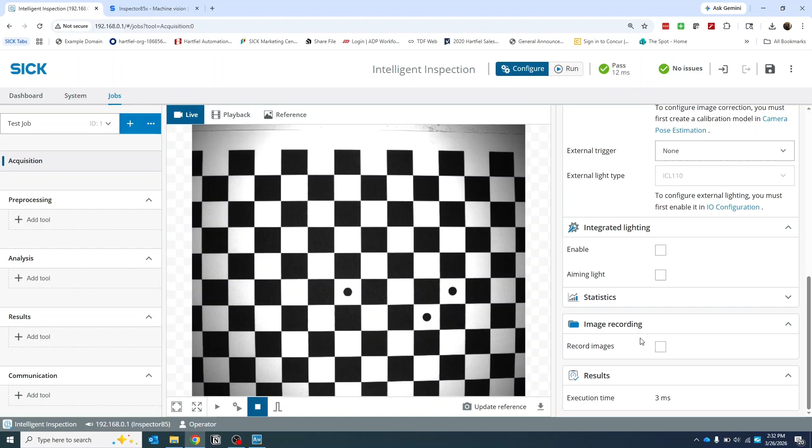And then how do we want to trigger the camera? Do I want to trigger via that photo eye or a sensor tied to us? Or do we want to have this command channel trigger via Ethernet IP or something like that? And then lastly here, we can record images through here. We will show a better way to do this, but if you wanted to record images, especially when you're setting up a camera and need to collect a lot of data, we can do that right through here.

So before we run into the other tools, I'm actually going to come into this system tab here. We're going to set up the camera a little bit more. So we've got our IO configuration to start. You can see that we have a handful of IO here. Our IO1 is always going to be our image trigger. And then other ones, we have some options here.

So our IO2, you can see we've got an encoder input. We can use it to update our reference image or job selection. The other guys here, we are able to do that job selection to build out a tree. I can trigger that external light if we wanted to, or update that reference image. So you're able to kind of set up your IO depending on what you need.

The next tool that we have here is the fieldbus tool. Now, I already have this set up as Ethernet IP, but you can see we can turn this off or have Profinet or Ethernet IP here. We can do DHCP if we need to. And then one thing to note is that we can have a separate IP address for the Ethernet IP than we do as the programming interface.

Really useful if you're connecting to a PLC but still want to program it without interrupting that traffic. Some of the other tools here that we can add is a command channel. So again, if we wanted to control the camera through an external source, we can come into here and say, I want to interface via fieldbus. Now we could do that with the fieldbus, we could do it with serial, or by setting up some of these TCP or UDP tools as well. We'll just leave it as fieldbus for right now.

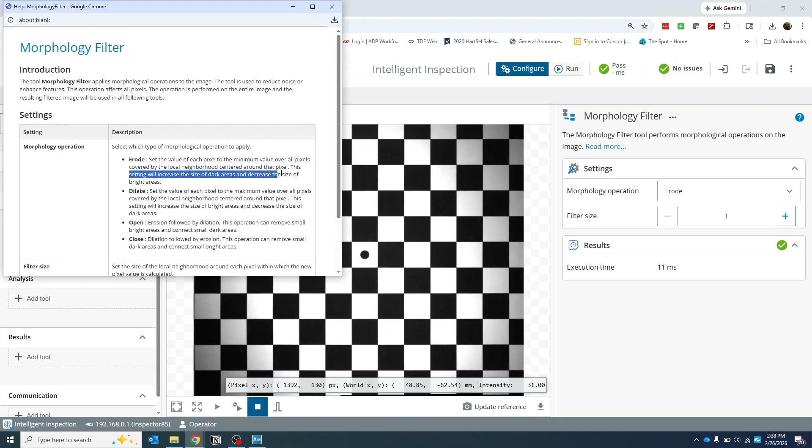Now, if you're not sure what erode and dilate and open and close mean, we can actually come into here and click this read more button right here. SICK has done a really good job where they've started to pull out some of the operating instructions and pull it into the software itself. So we can actually come into here and go, okay, what does erode mean? Erode: this setting will increase the size of dark areas and decrease the size of bright areas. Now you're able to very quickly know what these are.

We do also have a noise reduction tool. So if you are running into some noise that you want to get rid of, say our brightness is up pretty high, we are able to do that here. Again, for this application, we're going to just kind of run by.

So now we get into our analysis. This is where the meat and the potatoes of the vision software are. We've got a couple of different tools kind of grouped together here. We've got our locate tool, so blob locators, object locators, and we'll show that in a minute.

We've got some of the shape tools. So am I looking at circles? Do I want to find lines? Anything like that. Once we have our shapes found, we're able to get angles between them, distance between them.

And then once we go down to our count and find, we start getting into some of the AI tools that are available, and we'll show some of those here in a minute. But just note that there are D-Studio versions of some of the tools, which basically means that we are going to load a neural network in here rather than training on the camera.

Now, I won't show the D-Studio here. If you do have questions, feel free to reach out. We might do a video on that a little bit later if we get more interest.

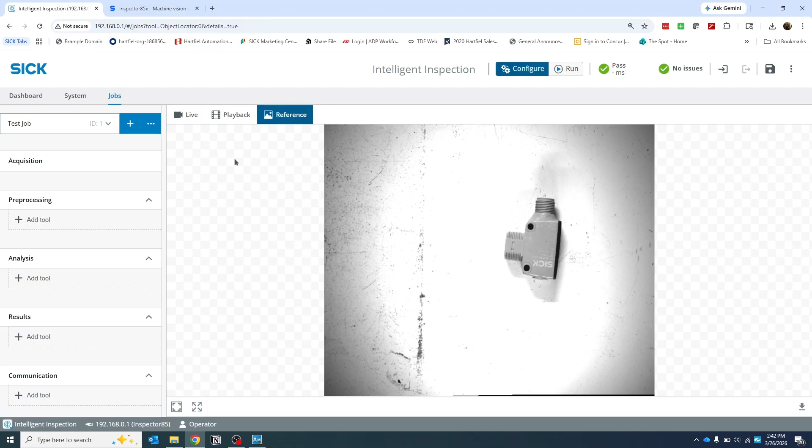So I'm going to come into here and show the object locator. Object locator isn't necessarily always needed, but it is good, especially if your product moves very slightly, or there's some rotation, or you just want to make sure that you're locating always correctly.

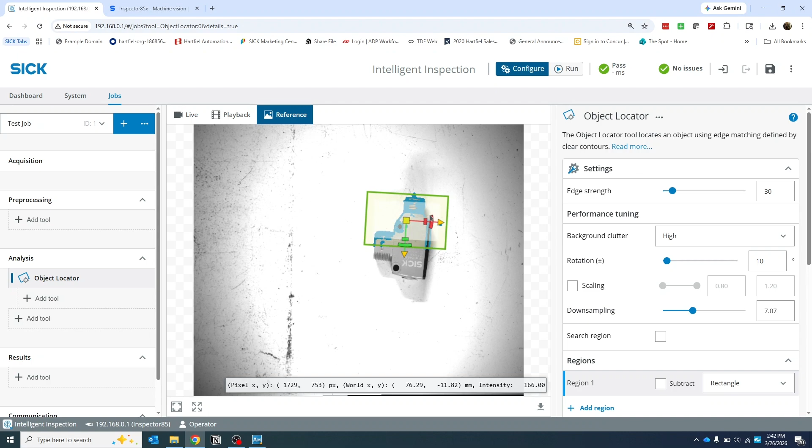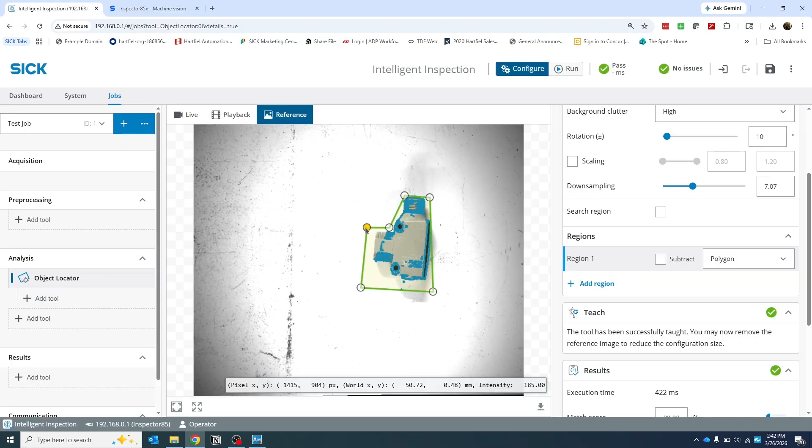So you can see here I've just got a bounding box for the tool, and I can rotate around the z-axis, come in and make this as big or as small as I want. I can even change this to an ellipse or a polygon to highlight it as neatly as I want. For this application, I don't need to get very specific, so I'm just going to do a general overview of the sensor and get pretty close.

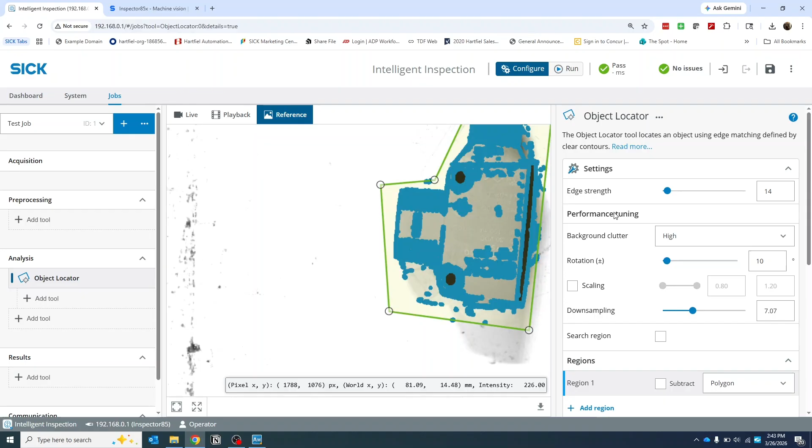Now on this edge tool, we want to find where the edge strength makes sense. If we bring this down, you'll see changes in what I'm outlining, so smaller defects, cracks, or scratches start getting caught. If I move this up, we might only catch the outline, just this black part on the back, which might be enough for the application. Here we're catching the circles for the mounting holes and that black back, which works pretty well. Maybe I want to take this nose away.

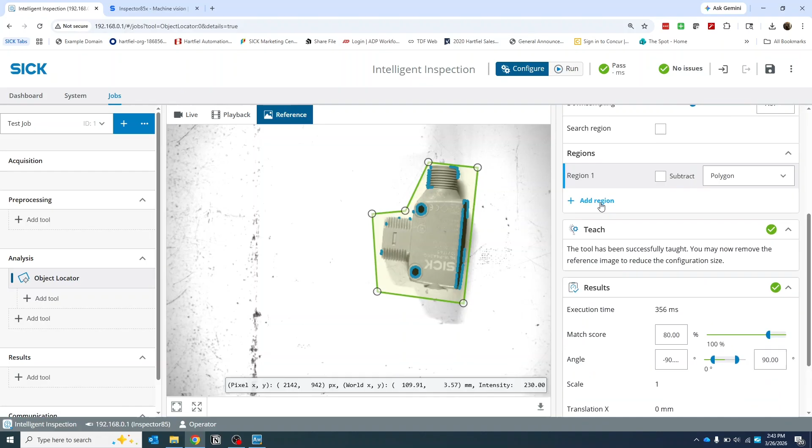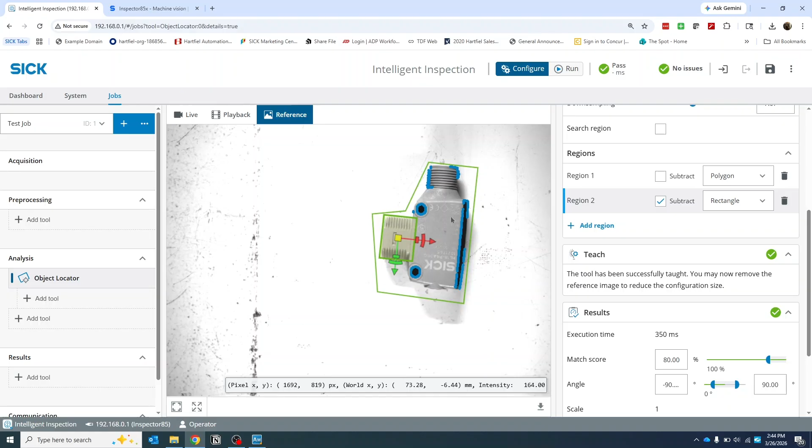I can either move my bounding box, or come in here and do a subtract region, so maybe I want to get just this and filter out specific areas. This is very useful if you're doing, say, bottles with different labels on them, or parts where something can change a lot. We don't want to look at those specific areas, but we want to look around them, so we can mask out different areas.

Now inside here, you can see we can set up different background clutter levels. We've got a pretty noisy background here, so I'll leave that as high. I'm going to allow this to rotate 180 degrees. And then if there are height variations, we can get into the scaling, and again that downsampling, so we're able to downsample a little bit more or less depending on what kind of speed you need.

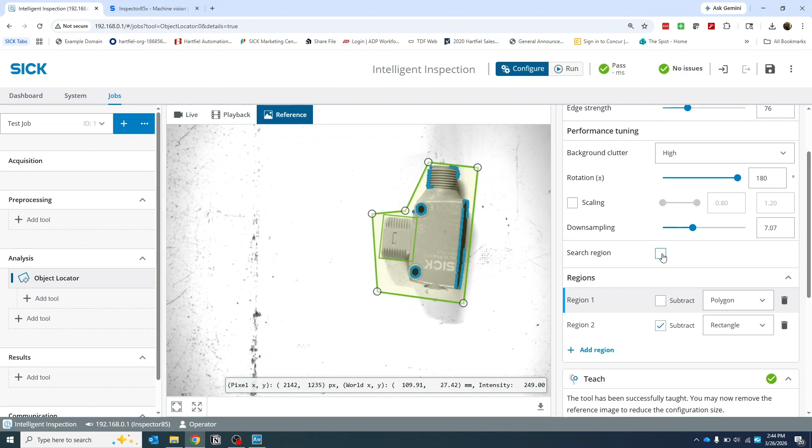Lastly, on top here is just a search region. If we wanted to look in a specific area for this object on our object locator, we could do that. Again, it helps with speed, and it helps if there are only certain areas where this object is going to show up. As we go down here, we're going to see the results over on the right-hand side.

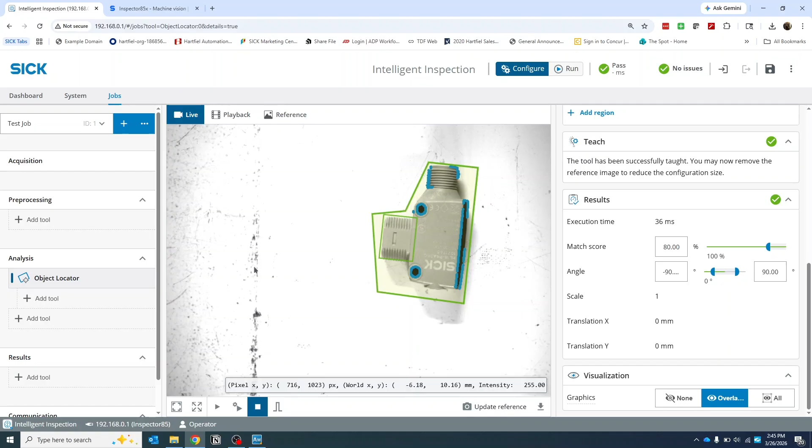So as I come in here and go back to my live image, if I move this part and rotate it, we might see that match score change a little bit, or be pretty low here. So I can come down and set where I want the tolerance of my rotation to be.

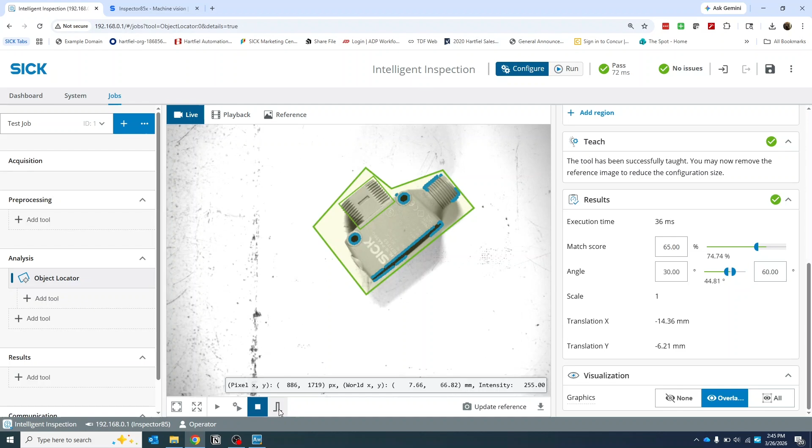I can also come in and say where the pass and fail is. If I want to make sure this is always right on, I can say I'm going to be at, say, 30 degrees to 60 degrees. And then if it's outside of that, if I rotate a little bit more, we might still find it, but we're outside the angle we've set up. You can see we've turned red here -- we can pass and fail on that.

Now I'm just going to set this on max because I want to pass and fail on some other tools instead, but we're able to set that up for just about any of the tools here. This is really useful once we start getting into our I/O for passing and failing products coming through.

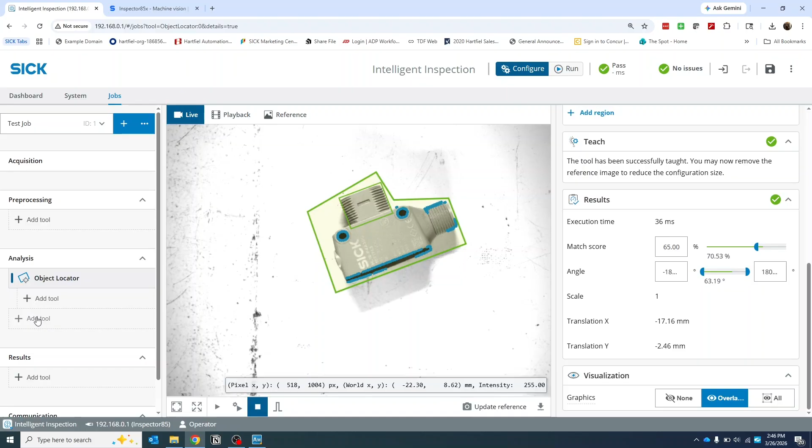Now what I want to do here is actually add some tools onto this sensor. So we can see I've got the two add tools here now, so I can add tools. This bottom one will bring it underneath the analysis. So if I wanted to do, say, a fixed point or something like that, I could come in here, and this fixed point would always be right here.

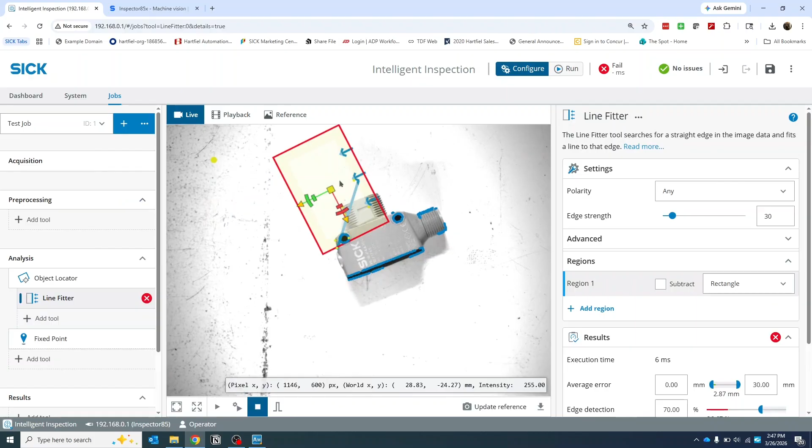Now I am not indented underneath the object locator. So if I come in and add a tool underneath the object locator, say a line fitter, I can come in and see, on the left-hand side, we are now indented on that object locator. So I can come in and now find my line.

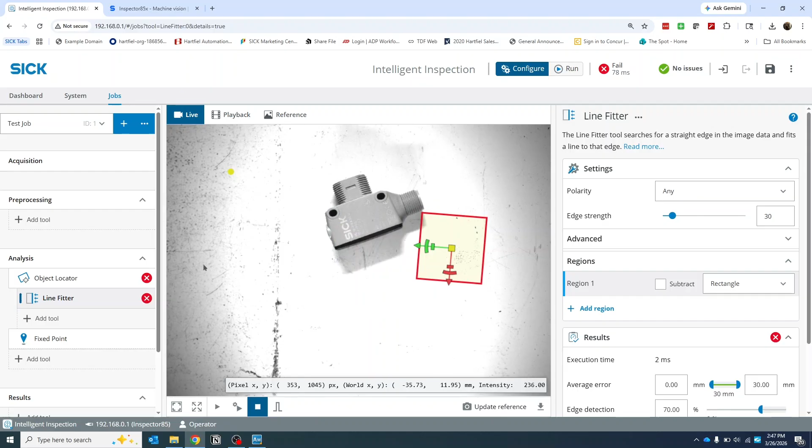As I move this now, say I move my photo eye up just slightly, we can see my object locator did not find that, probably because our lighting is a little bit funny. So we'll just turn this down for right now.

But now our line fitter has moved alongside the photo eye. Very easy to set up so that as your product moves just slightly, you are able to always get a nice view where you want.

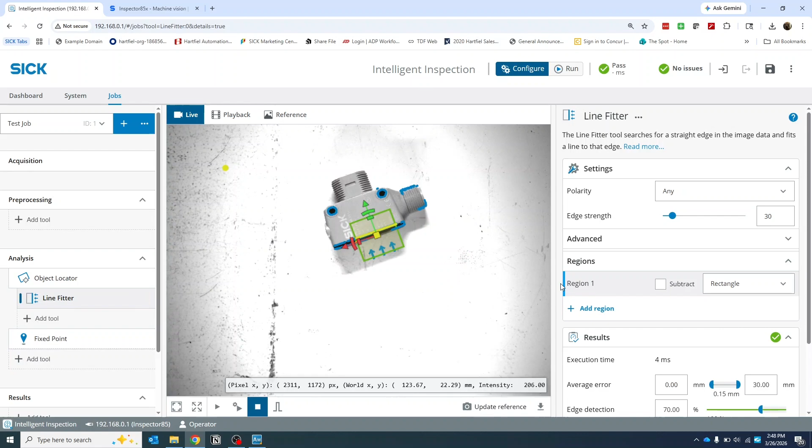So if I wanted to change these, I can also come in and move this line fitter up to analysis, and you can see that it now does not move. It's going to be based on where you set it up in the reference image. Versus if I come back up to our object locator, because we had this in our reference image set up on the back of the sensor, it's going to follow along with that object locator.

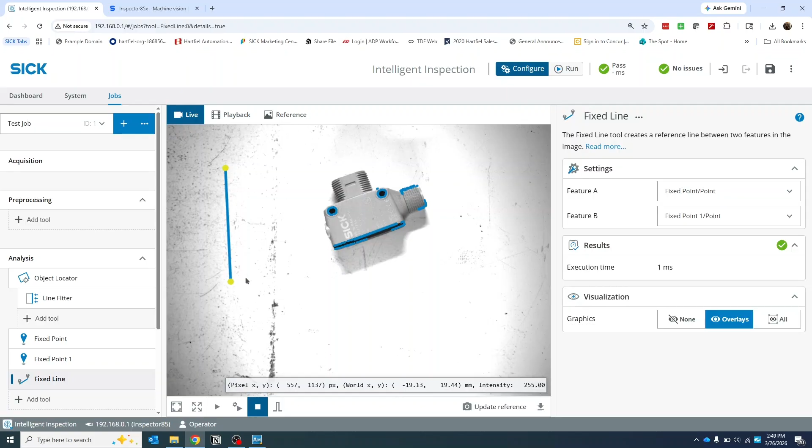So I'm going to set up just a very quick another fixed point, and I'm going to do a line between the fixed point and do a fixed point and a fixed point. Now, these are just out in space here. These will always be fixed. A nice way to have your fixturing there, or have a known point that's lined up with the coordinates of the camera.

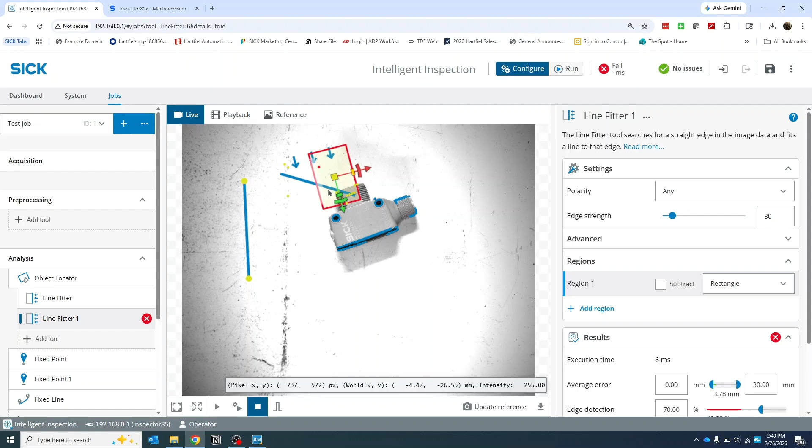I can then come in here and maybe I'll add another line tool on our photo eye, looking at the front of this photo eye here, and you can see as I narrow this in, we're getting a couple of different points here because I've got really two edges that it's fighting with.

So my settings over here will let us really come in. Our bottom one here was nice because we had a black line, a lot of contrast. Now that's not always the case when you're working on a camera. So we can actually come into here and go from bright to dark.

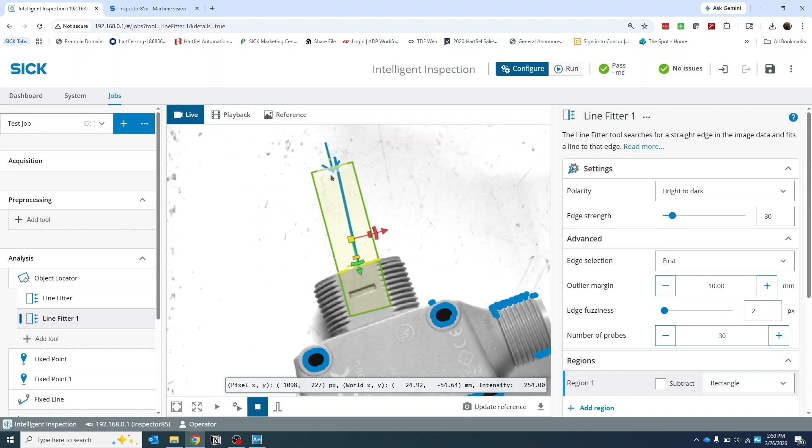And I want to come into the advanced and really pick that first line rather than the strongest line. I can bring this in here. And now you can see we are picking up that little scratch in the background, but most of them are right here. Now that scratch in the background, again, just like the object locator, maybe we can come in and find a spot that it really makes sense on the camera to get this set up.

We can also come in and look at our outlier margins. So I want to know, within 10 millimeters or even 1 millimeter where the lines are. We can increase the number of probes on here. So if I wanted to get much more accurate, or I really just want a general, we're able to do that.

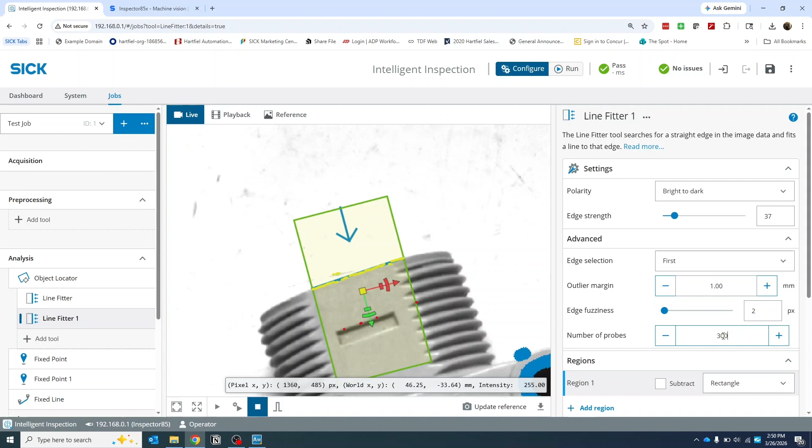And then we do have kind of this edge fuzziness. So you can see, even though now we're picking up a couple of those points, most of them are right along that edge, so we're getting a nice edge there. We can also narrow this down because we know where the photo eye is always going to be.

And then again, just like the object locator, these lines do have some different results. So if we wanted to do, say, a look for flashing, or maybe on a board, there's an indentation on the board, we would actually see this average error go up, or maybe we'd see this edge detection go down. And so we could pass or fail off of that right here.

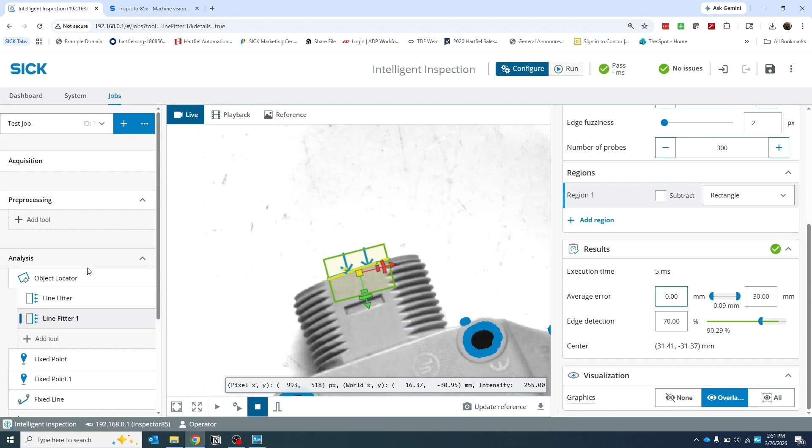So now that I've got a couple of lines and a fixed line here, I'm going to come into here and do a measurement. And I want to do a measurement between the sensor. I want to know how wide that sensor is. So we can come into here and, man, these are kind of hard. I'm not sure which one is line and line one.

So before I do that, I'm actually going to come here and right click on the line fitter and hit rename and say backline. And I'm going to come into here and rename this to be nose line. And now I can come into here and you can see that I've got backline and nose line.

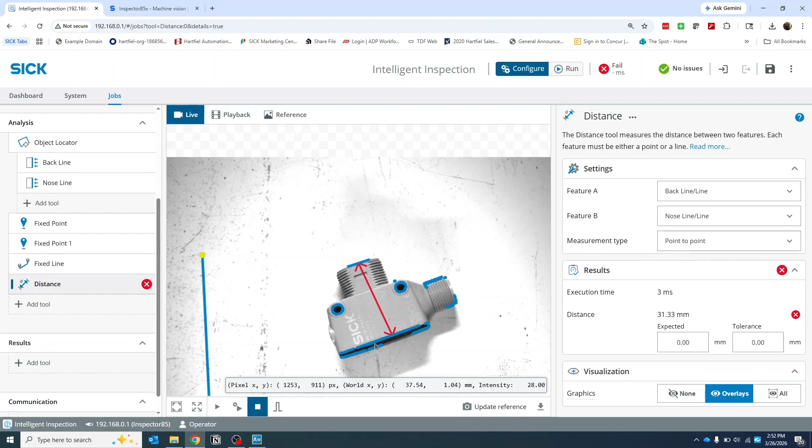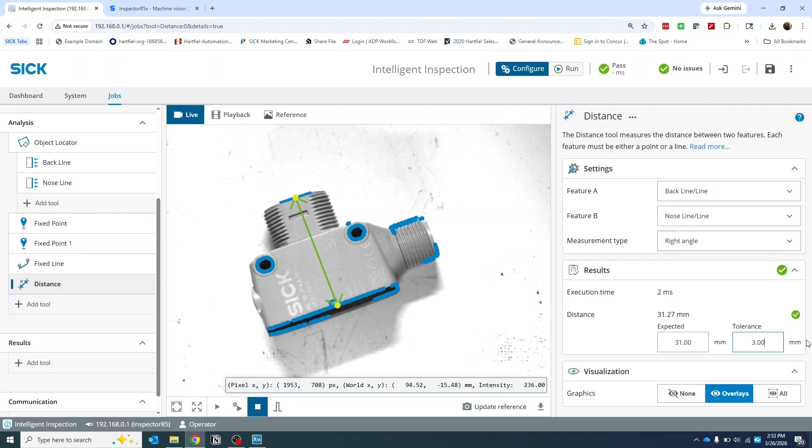And now we can see we've turned green, we're good to go. The other thing I'm actually going to do here is take my angle measurement, and I want to measure from the back of that line to our fixed line.

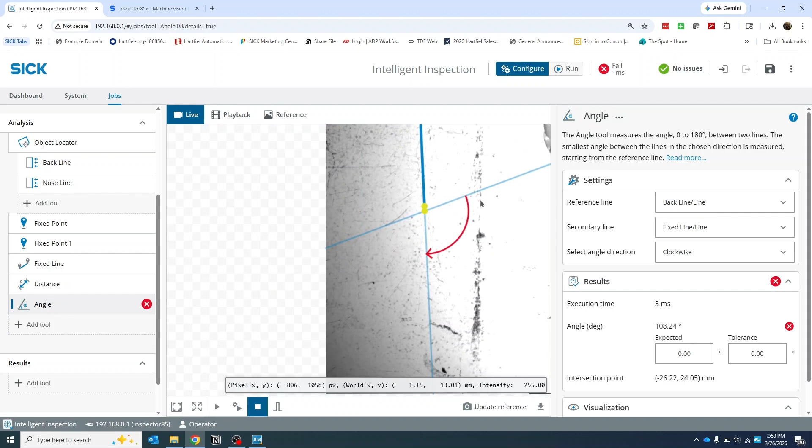So it's pretty neat to be able to come in and get a specific point on that intersection. For different pivoting applications or anything like that, I can change between clockwise and counterclockwise, and set something up that's looking for a specific angle. Now, I'm just going to set this up 90 degrees with a tolerance of 90, because I really just want more of an FYI here rather than passing or failing.

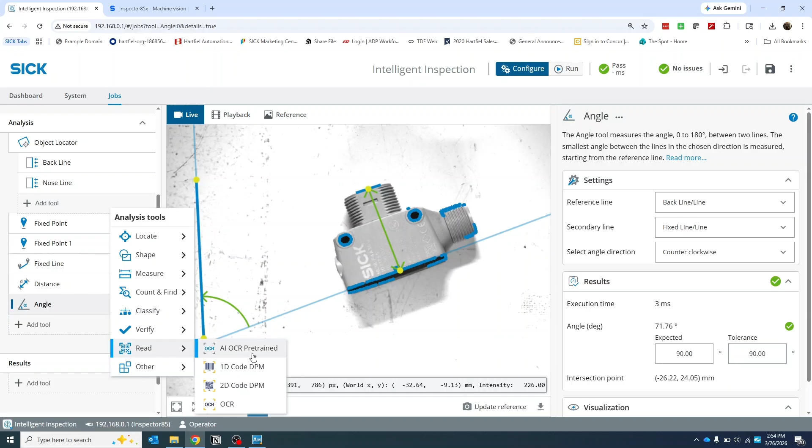And I'll show you how to give this information out to a PLC as well. The last thing I'm going to add here is an OCR tool. Now this AI OCR pretrained tool is using AI to work on this, and we're going to come down here and read the SICK name right here. So you can see we didn't really have to do a whole lot to get that SICK name.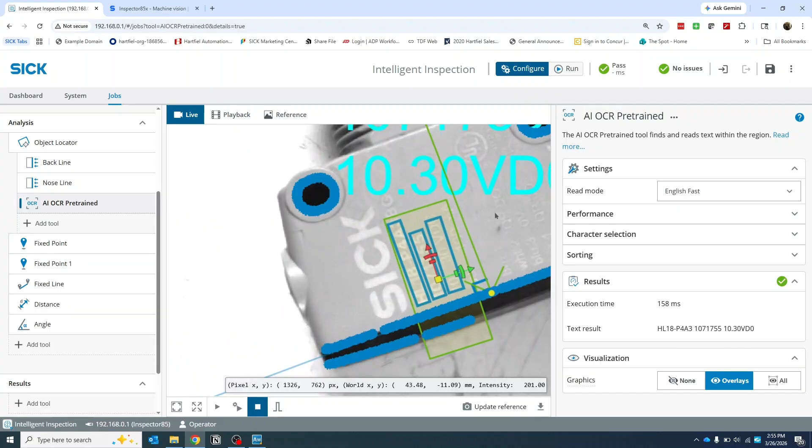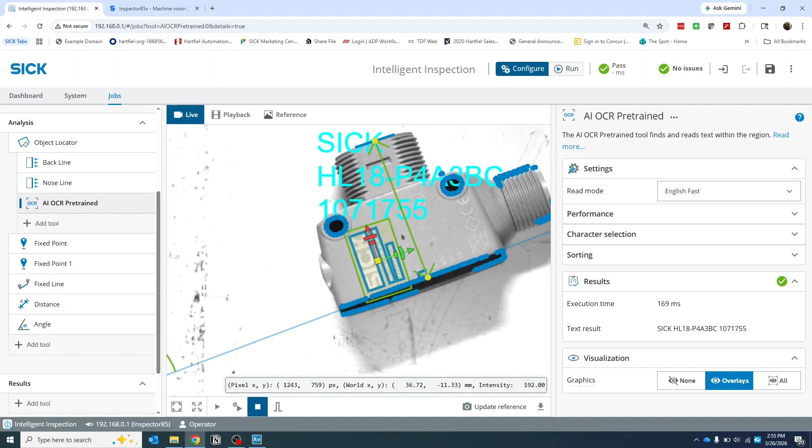We can also make this bigger and see that we are reading all of the different text on here if we wanted to. And that again will follow along with the sensor, so we should be able to read this at all times.

We can make this a little bit more robust for those harder to see applications. We can also get some of that downsampling again. Maybe we might have text upside down, or we might want to only use capital letters or special characters, anything like that. And then we can sort this, line by line, top to bottom, left to right, all done inside of here.

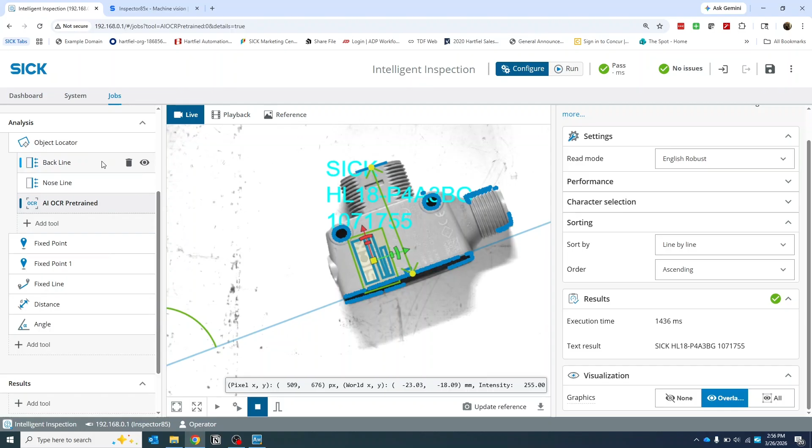Now, the one thing I will say about the OCR is it's a pretty slow process. In the results, you will see throughout all of our different results that it gives you the execution time for that tool. So just keep that in mind.

Now that we've got this set up, this starts to get a little bit messy on my screen here, so we're going to come back and start turning off some of the graphics. As I hover over a tool, I've got the object locator here and this eyeball. If I click this eyeball, it gets a strike through it and you'll see that blue outline of the object locator disappear. If I want to keep that on all the time, we're able to put a box around it, which means it's always going to be available.

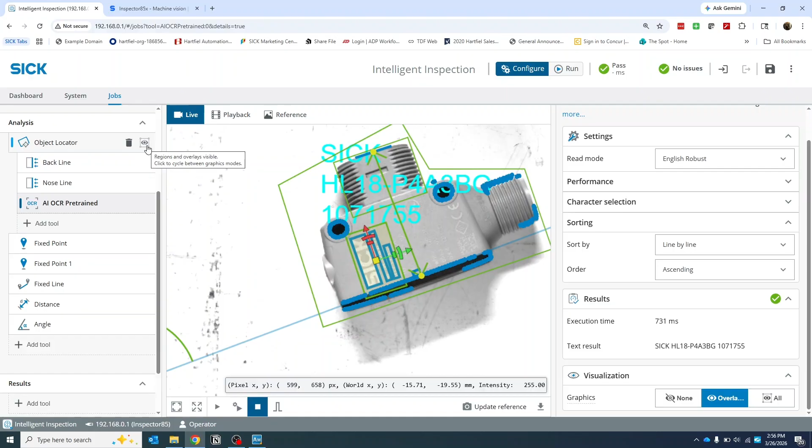So what I'm going to do is turn off some of these: I'm going to turn off our fixed points and our fixed line. I want to keep my distance here, so I want this to always be present. I want to keep my angle always present too. And then we can either add the OCR or not—let's just turn this off for now, because we can get that out in a couple of different ways.

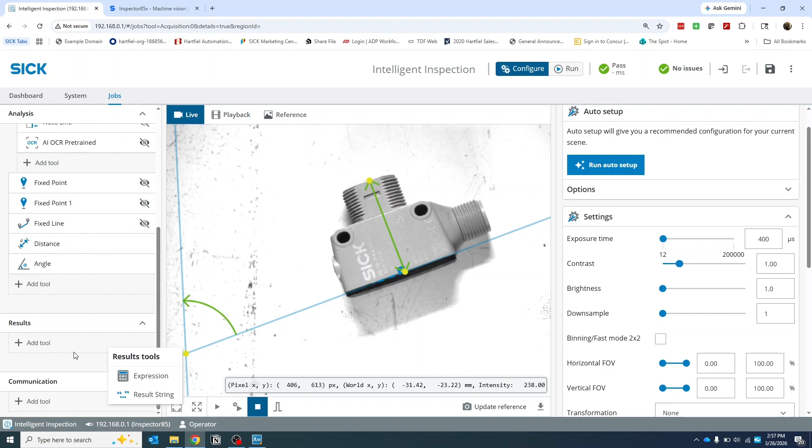So now that we've got that, we're going to add an expression that looks at some of our tools. I can come in here and see what the different selections are that we can do inside of here. And then we'll be able to really do a lot right inside of the camera without ever getting the PLC involved.

So if I wanted to come in here and say my angle needs to be less than 71—and we can see that it's 64—this would give us a true signal out. But I also want to look at this and say my distance, let's do maybe an ampersand, distance that we have set up, is greater than 30. Now you can see this is yelling at me.

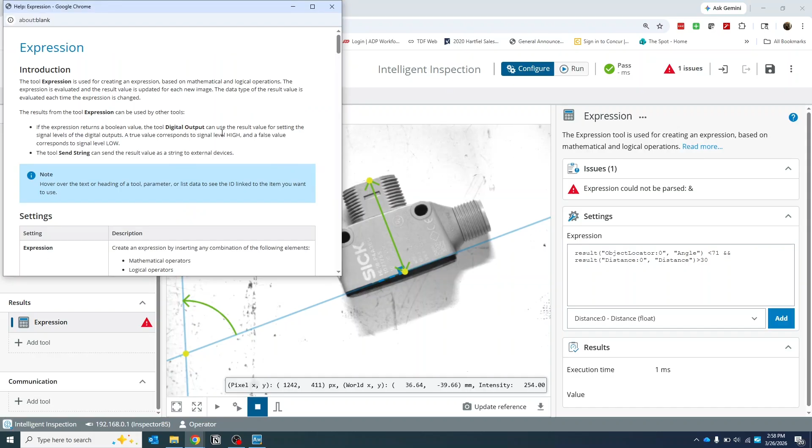This expression could not be parsed. So, ampersand—different people have different syntaxes here. What I can do is click on 'read more,' and inside here they actually have a lot of different examples to get different expressions written. And if we go all the way to the bottom, they have what all of the operators should be. So we see, oh, it shouldn't be an ampersand, it should be the word 'and'.

So now I can come in here and say 'and,' and this should be happier with us. So now, because our distance is greater than 30 and our angle is less than 71, we get this true signal. So we can set this to an output, or set this to do different things inside of here.

I'm going to also build a result string here. I want to have my job name so the robot knows what my job name is, comma. Maybe I want to know the center point on that back line, with a comma, and then the text string right here. So now out of here we get the job name, test job. We get the center point of this back plane of the sensor and the XY, and then we get what sensor it is.

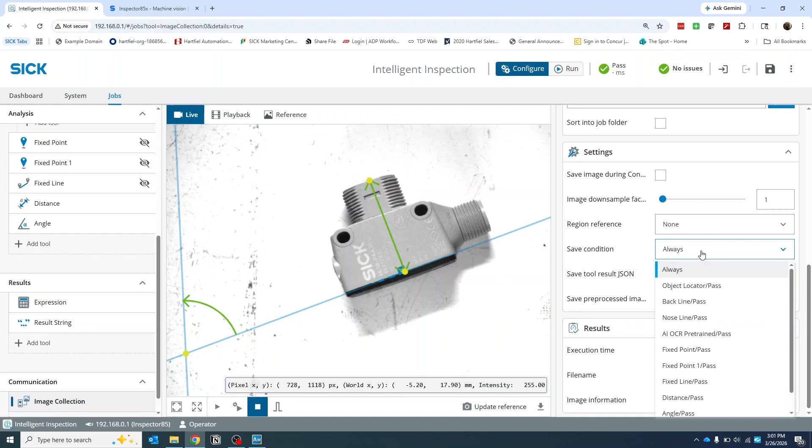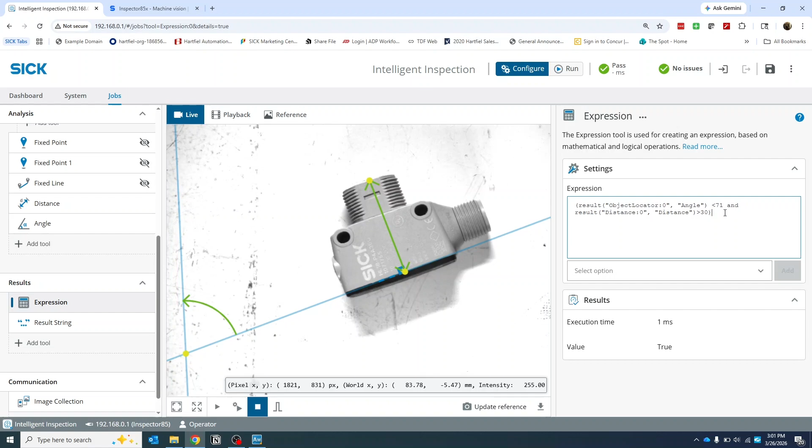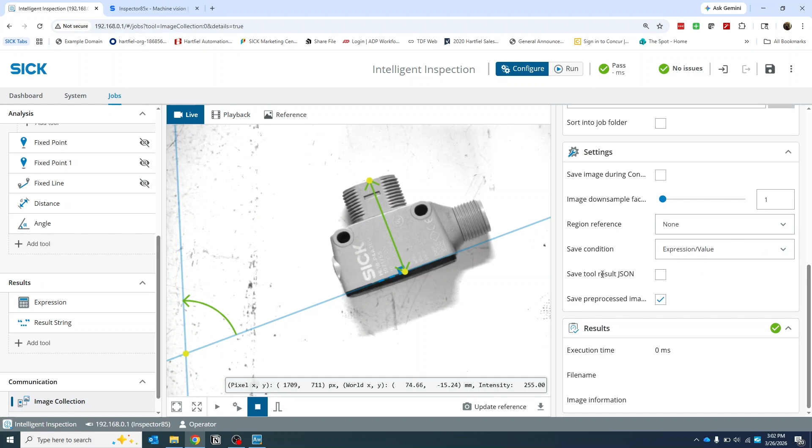We could come in and say this expression, as long as those two are true, I want to save an image. A lot of times you'll want to put a couple of different tools inside an expression and say, as long as none of these fail, I don't want to do this. So if this is false, I want to save the condition. We could do that, coming in here and saying if this equals false, we can see now that this is false. If either of these were not true, this would turn true, which would mean we're out of the tolerance we set up for the sensor, and we're going to collect that image. So it's very powerful to see what's going on right in here.

We can also set up digital outputs. Most of our digital outputs were set up for the output out of the camera in that system tab. Maybe I want to come into here and have a results-ready bit, so I know that as soon as the camera takes an image and the results-ready bit goes high, we can say okay, we're good to move on to the next part. And then maybe we can have this any-passed, all-passed, or any-of-them-fail, or we can look at very specific applications or tools here.

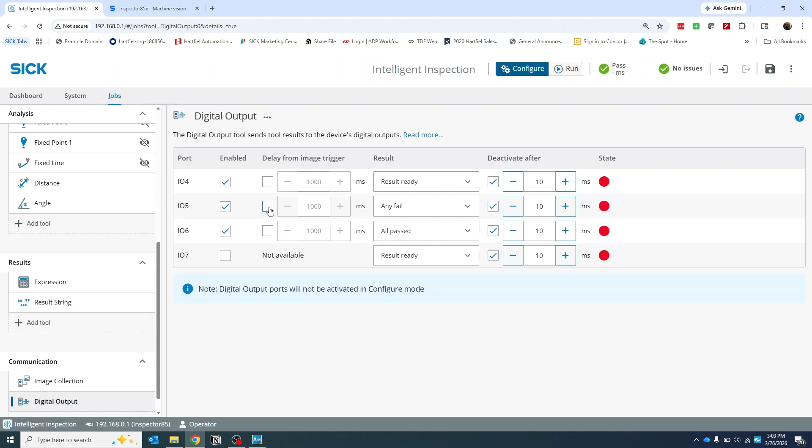So for right now, we can do this any-fail: if any of them fail, I want an output. And then maybe I want to have an all-passed, just so I know that everything's going well in the camera. And again, we can do that through our Ethernet interface as well.

So we get a lot more information here. We can set up the job ID. Maybe I just want to pass in the distance value here, and select another one to do, say, the object locator. We could even give the X, Y, and the rotation. We could get any error codes, we could get what that angle is, or if we actually came in and got some characters, we could grab that output string we set up here, and maybe get another character that has just the pre-trained AI OCR text in it, although I suppose this has it in it as well.

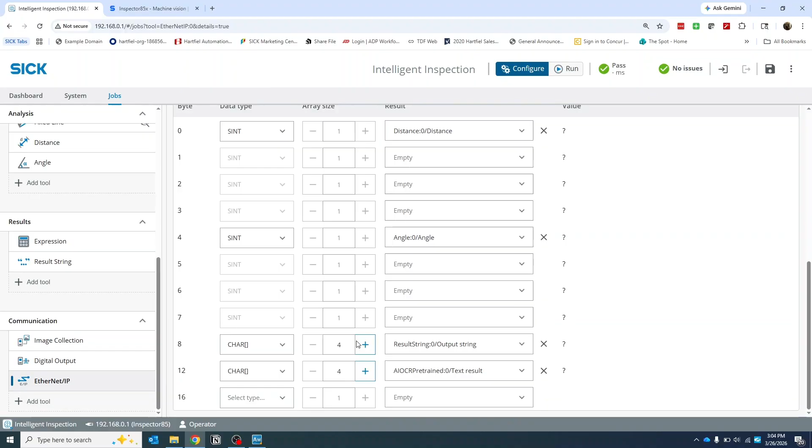Now, once we set this up, we can actually download the UDT for the PLC and pass that right in. So it makes it very easy to come in here and add different data types and everything, and then map it in the PLC.

So now that we've got this standard job set up, I want to show a little bit of the tools for AI, because this is something that's really starting to become pretty powerful. I'm going to hit the plus button up here and create another empty job, and say AI job, and create. So now you can see, again, our image—we have to come in and set this up because images are per job. So I set that up at 400. We've got to make sure we turn off the lights as well. And then everything else seems to be pretty good here, so we'll leave that the same.

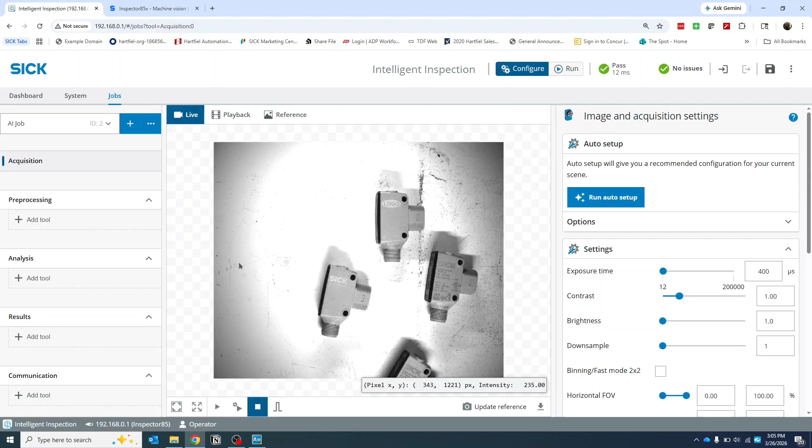Now I'm going to come in and add a handful of H18 sensors here, and then take an image. We can come in, and one that we've been seeing a lot of people use is this AI object detection. So this AI object detection, we can actually come in here, and we've got this radius set up. I think we're going to need a little bit bigger radius, so let's do maybe a 300.

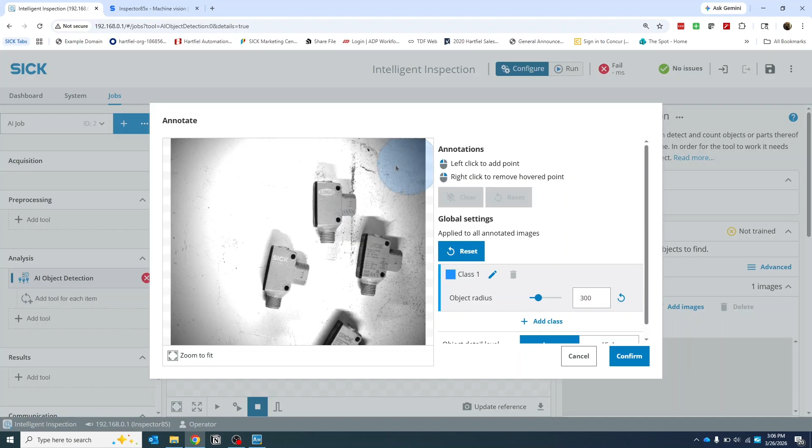I'm going to come around each of these H18s and train the AI on what these look like, so that it tells us how many of these it sees and where they are. I'm going to take another image and refine this a bit more.

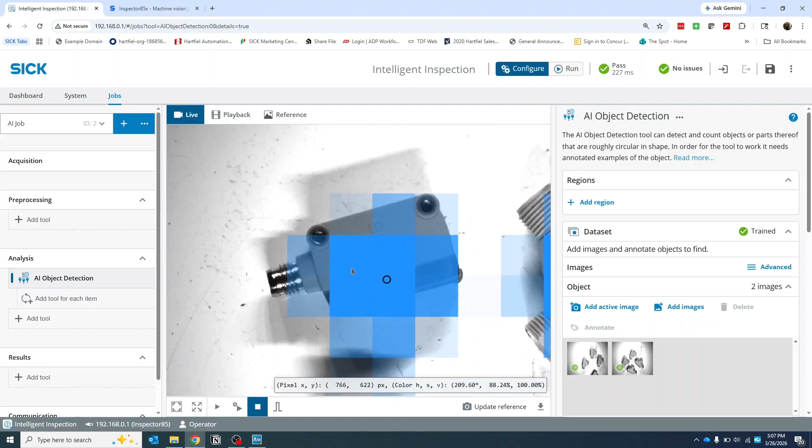Then I'm going to introduce a second sensor and take another image. You can see how this originally thinks it might be an H18. If we come down here, there's no other classes, so it doesn't have anything else to compare this to.

So what we're going to do is come in and say, well, these are H18s, but this is actually a G6. So let's call this G6, and let's call this H18.

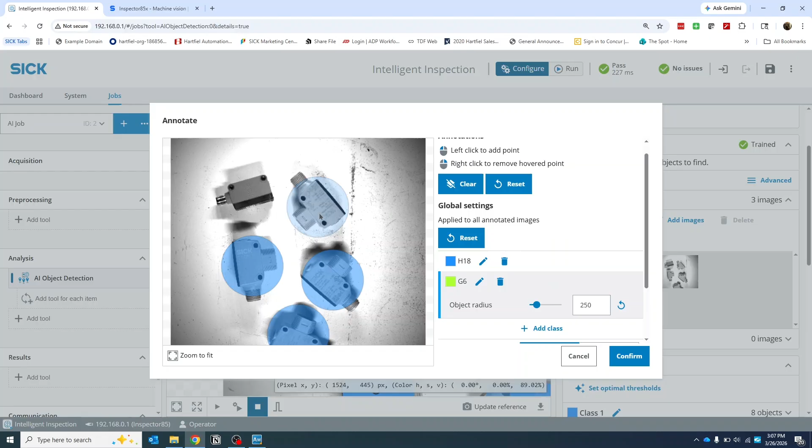Now, unlike the H18, this guy's a little bit smaller. That might not be enough, so let's go up to 250 and grab this guy. Now you can see it's locating this guy correctly.

Now, if we come down here, we're able to see what the class name is and what the center of gravity is. We're doing this a lot for robotic applications where we're looking for, say, holes to put in different bits or threads or anything like that. We're also doing this a lot for kitting, being able to count what kit this is or what object is in there.

We can also add tools onto here, like character recognition tools or some of the measurement tools we showed in the last step, which is pretty powerful. Now another thing we can do here is inside of our classify.

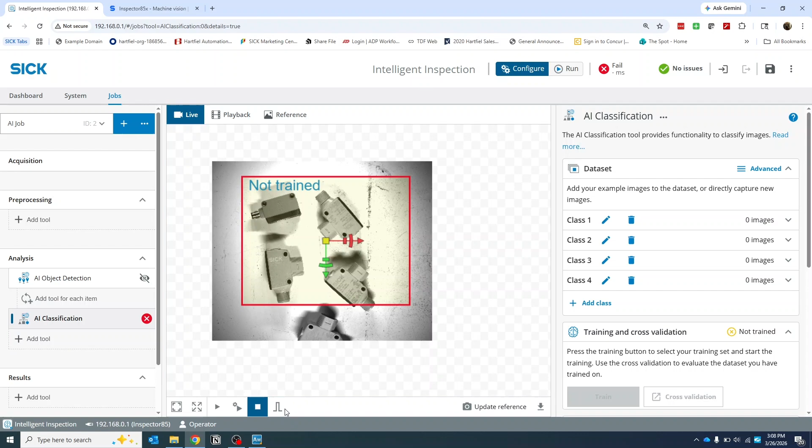This is more of your traditional AI in cameras that people typically think of. So if we came in here and created an area and took a new image, we could again have an H18 class. So maybe we'll name this H18 class. I'm going to add an image, come in, add an image.

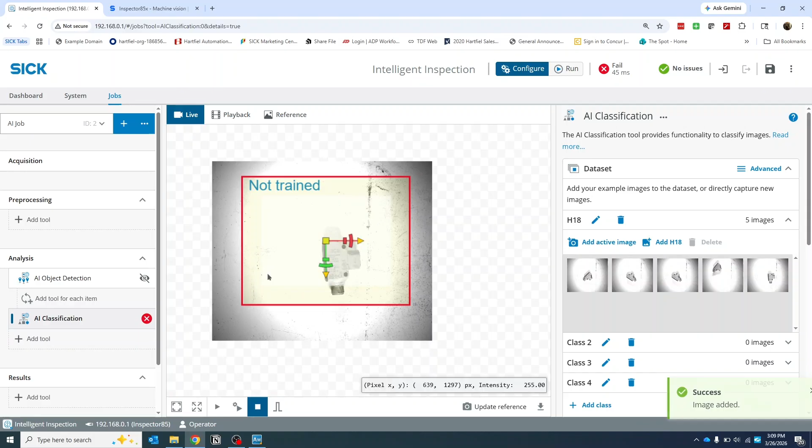Add a couple of these guys here around, just so we get a little bit on here. Then I'm going to throw that G6 in and have a G6 class. G6. I'm going to add the active image and do the same.

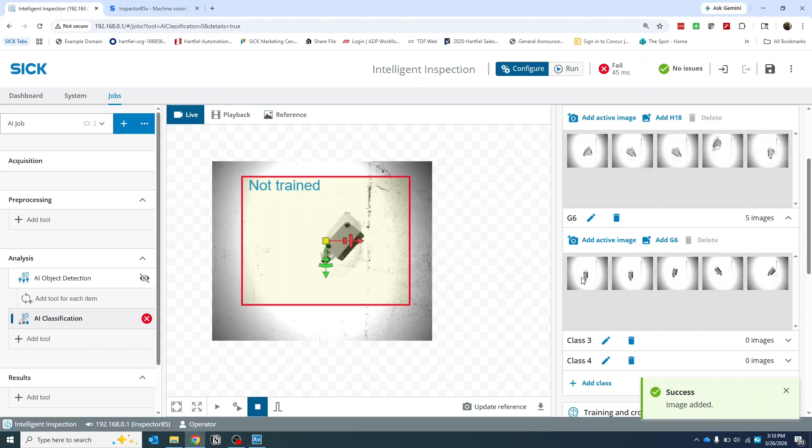Now, in your process, you would actually throw this into your process itself and find the different deviations inside of the sensors, in this case, or whatever your part looks like while it's on a line or a conveyor, to get the deviation. This is one we use the D Studio a lot for if we get into a lot of different classes or a lot of very close together, say, power supplies or something. But we're going to do this just quick on the camera itself.

And we can see now that we get this G6 just after a couple of images of the H18. We get the results of how confident I am that the class is a G6, and what's the difference between what I think it might be and the next biggest thing.

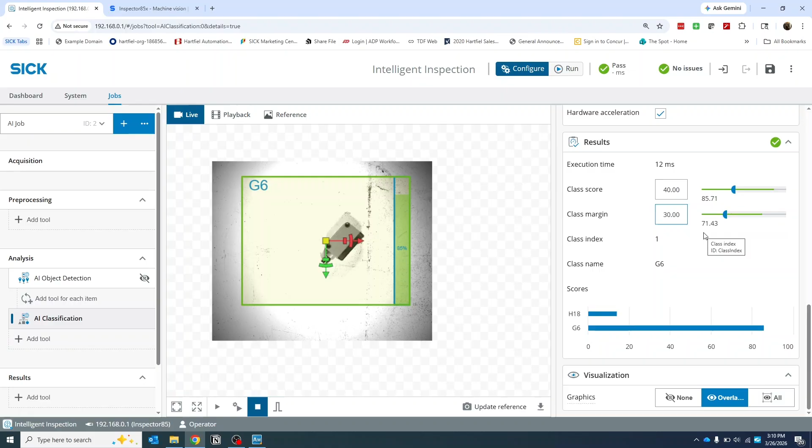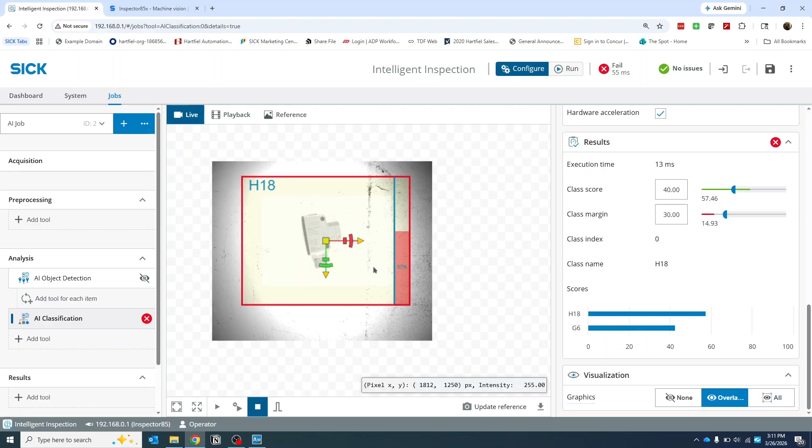If I put this H18 back in here, you can see I put it down towards the bottom of this box, so it's really not as confident because I didn't teach it quite as much. It's pretty confident it's an H18, but it could be a G6. If I move this up to more where I taught it, it should get more confident. It's probably also a different H18 that I grabbed.

You can see when this starts happening, we need to start adding more classes here. So add another active image, let's grab another guy here. You can see now that I moved it slightly, it's again an H18.

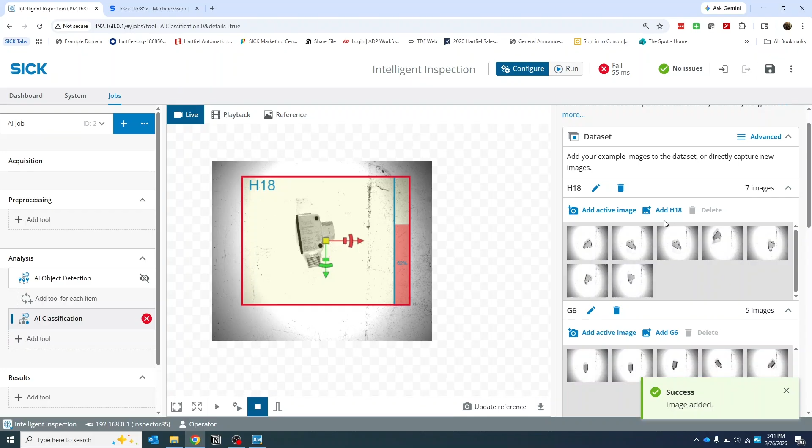We might need to come into here and just grab a couple more images and redo our training. Again, the training on the camera is meant to be kind of your simple applications, coming in and really making this more robust. You can see adding a couple more images, let's bring this back down.

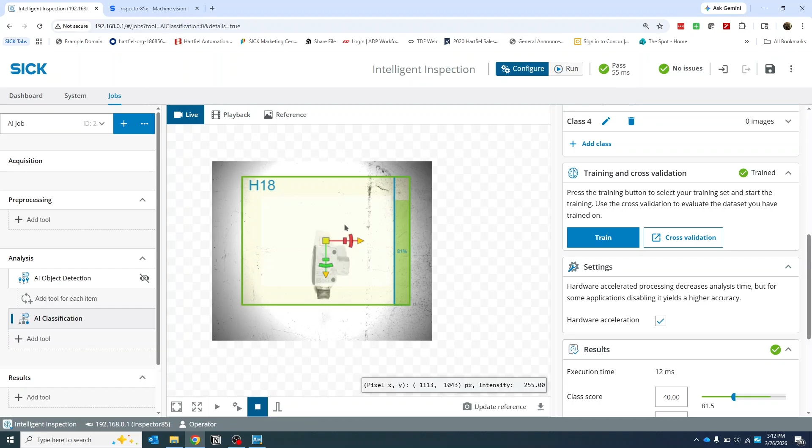That has really helped with that quite a bit. We can see that class differentiation just by adding 3 more images on here. So on camera, we can actually do up to 100 images per AI tool. You can also see that we have multiple AI tools per job here. So really the limit is how fast your camera needs to go.

With these 2 AI tools, we are only at 55 milliseconds. So the 800 series cameras really are made for AI applications. They have an AI chip built in, really useful for some of those typically harder applications that people run into.

Now, collecting all these images you can do through that image collection. Otherwise, if you have a camera set up, you can also see all of the images that have been loaded onto the camera right through this File Explorer. So hit our menu here, File Explorer, and you can see we don't have an SD card, but we've got a couple of different applications here. The Nova is the platform, and then we've got our different anomaly detection and classification and object detection images. So we can add from here or add into here as well, just by dragging and dropping.

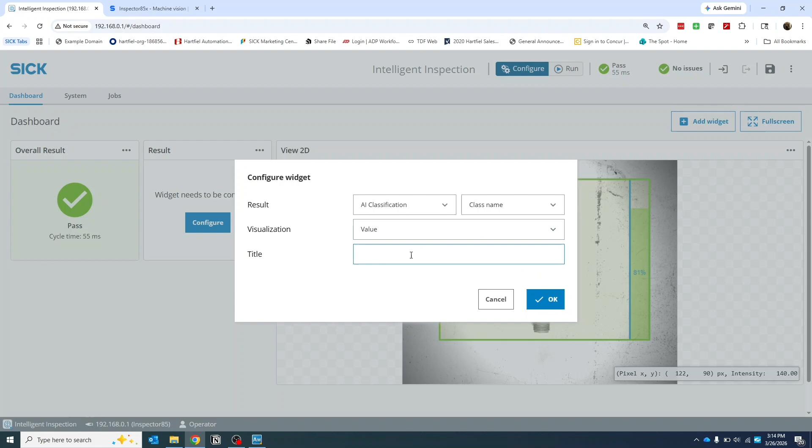So if I wanted to come in and maybe make this a little bit smaller, maybe I wanted to add a result and I want to take this classification and tell me what the class index is, or maybe the class name, and I want to have what is here. H18 is here.

If I wanted to come in and say we've got our 2 different jobs that we've set up, we can actually come in and have a job selection toggle. So now I can have this job selection toggle right here, so an operator with a touchscreen or something can actually come in and change between our couple of different jobs. You can see the one thing that comes in, because we don't have an AI classification tool 0 here, we don't have that result, but we can set up your OCR coming on here or anything like that.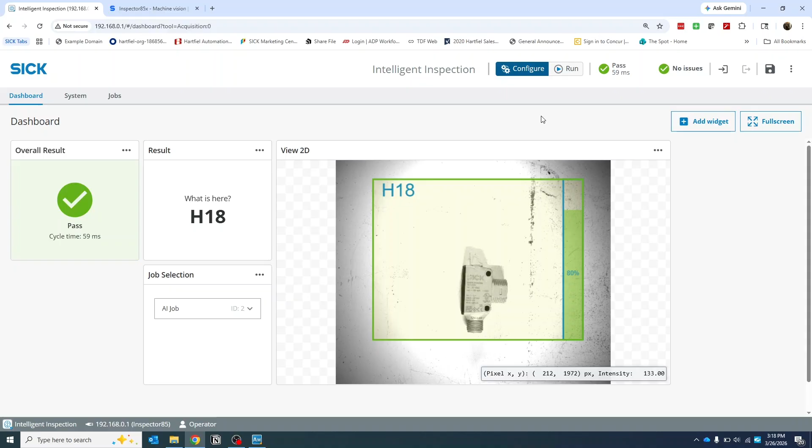So that is the overview of a SICK inspector camera. We will be having a good amount of videos coming out that show connecting up to PLCs and show different applications. But if you have any questions or would like to have a live demo, please reach out to your nearest Hartfiel Automation account manager, and we'd be happy to stop by, throw a camera out in the process, run through tools with you, whatever makes sense. I look forward to talking to you soon.